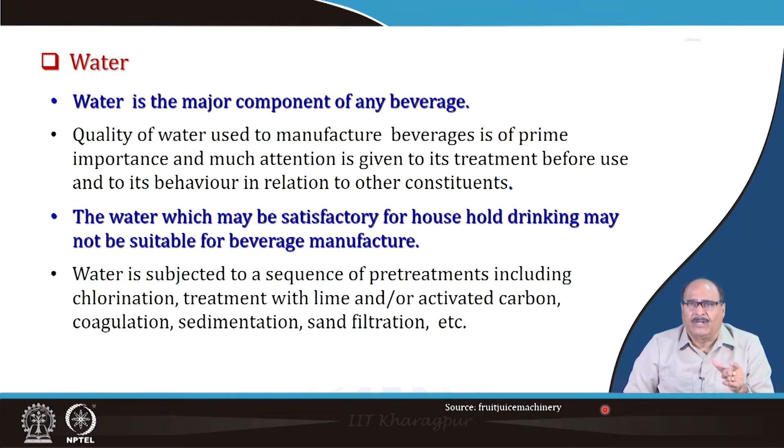The purpose is that it should not contain any suspended, colloidally suspended or dissolved solids. Otherwise, it may have unwanted reactions with the flavoring and coloring components of the juices, causing problems. So one should take care of that.

So this is the process flow chart for RTS mango beverage manufacturing. In the figure we have shown various brands available commercially in the market. As in the earlier lectures, we have seen up to pulping and extraction, and the same things follow here. After you get the pulp or juice of the desired soluble solids, desired Brix, it is filtered or clarified, and the clarified pulp or juice of desired soluble solids and total solids is mixed with the sugar syrup.

It is sent to the mixing tank, and that is very important: in the RTS mango beverage, what characteristics you want, whether a clear transparent juice or some mango solids content in it. Depending upon your requirement, you can do a proper material and mass balance using simple mathematical calculations.

For example, if you have pulp having 20% total soluble solids and you want to make a juice having 5% total soluble solids, you can calculate how much water is to be added. Accordingly, if you want to make it sweet, what is the degree of sweetness, the sugar and TSS level. All these considerations one can do with simple mathematical equations for the material balance.

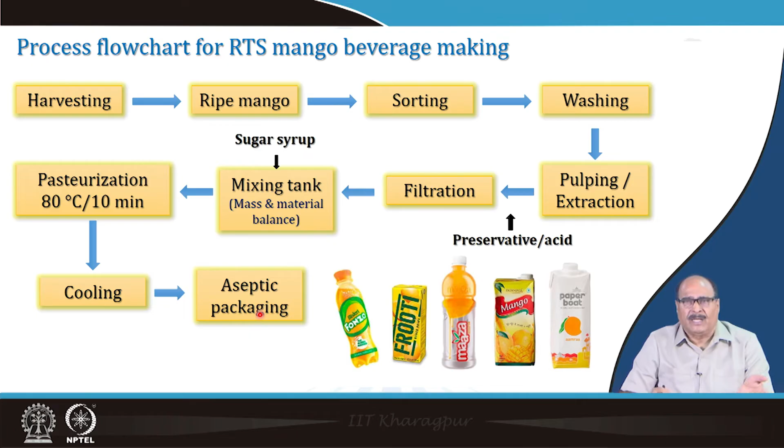After it is mixed properly, the RTS mango beverage is pasteurized at 80 degrees Celsius for 10 minutes, cooled down and sent to the aseptic packaging line. Aseptic processing and packaging we have already discussed in an earlier lecture.

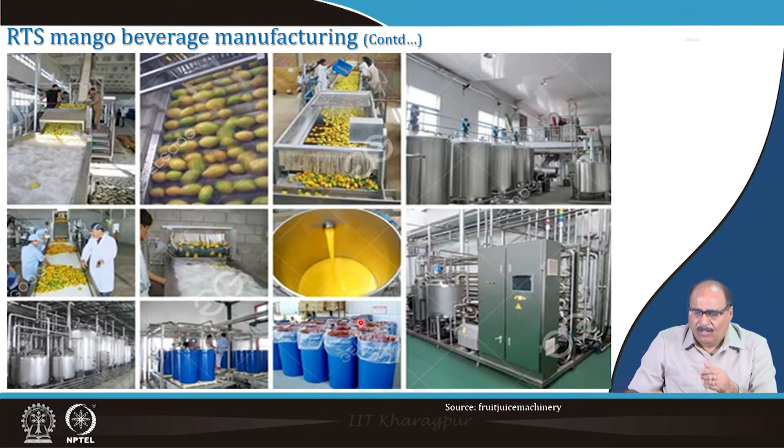These are some of the equipment and the factory line. The mango goes on the conveyor belt, then it is de-stoned and washed properly, the pulp is extracted and kept in containers, from where it is sent to the packaging line: aseptic processing, packaging, filling, mixing. These are the equipment used.

This is particularly for mango pulp, but the same equipment can be used for other fruits and vegetables as well, like the elevator, sorter, brush and spray cleaner, peeler, pulper, juice extractor, juice fine filter, pasteurizer, and aseptic packaging units. Almost all fruit and vegetable juice processing and packaging lines are like this, with some addition or deletion depending upon the characteristics of the fruit or vegetable. Otherwise, these are the most common.

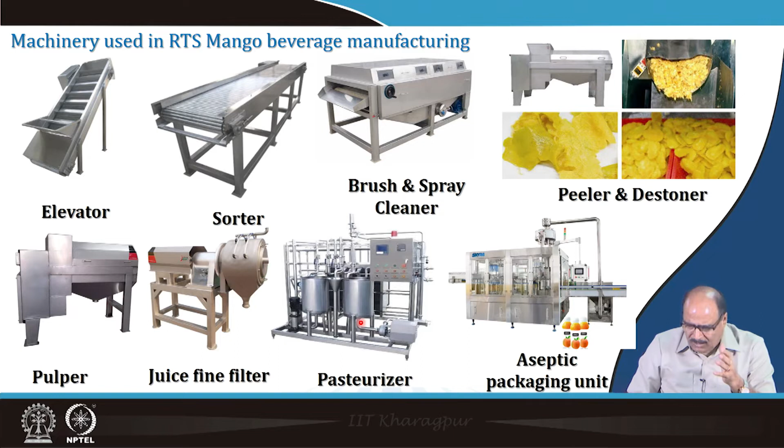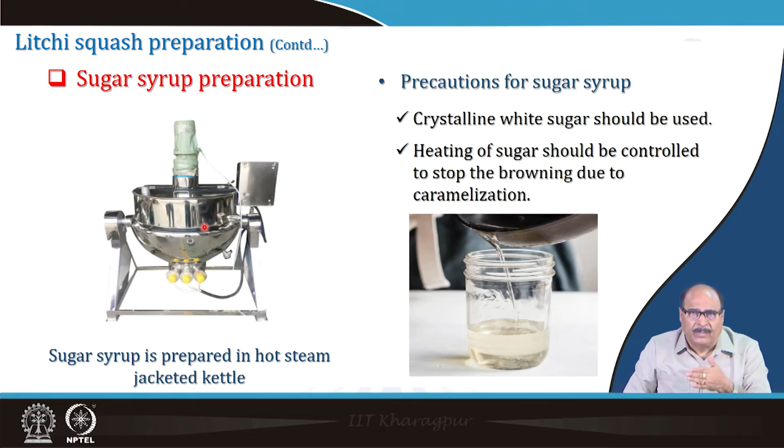So, in that 25%, what sugar level should be there so that you can get 40% TSS. But while doing this simple mathematical calculation, you have to take into account the complex biochemical interactions, that is, interactions of the different compounds which mix together, how the sugar is getting mixed and how the sensory characteristics are being diluted. Then it is followed by filtration, preservatives may be added, packaged, and then the aseptic processing line.

Then the cordial is another category of product. It is a juice from which all the insoluble material is filtered. It is a clear, sparkling, sweetened juice and is prepared from clarified juice. It should contain about 25% fruit pulp and 30° Brix TSS, with about 1.5% citric acid and 350 ppm sulfur dioxide as preservative. Lime and lemon are the most suitable for cordial making. They are generally blended together with wine for consumption.

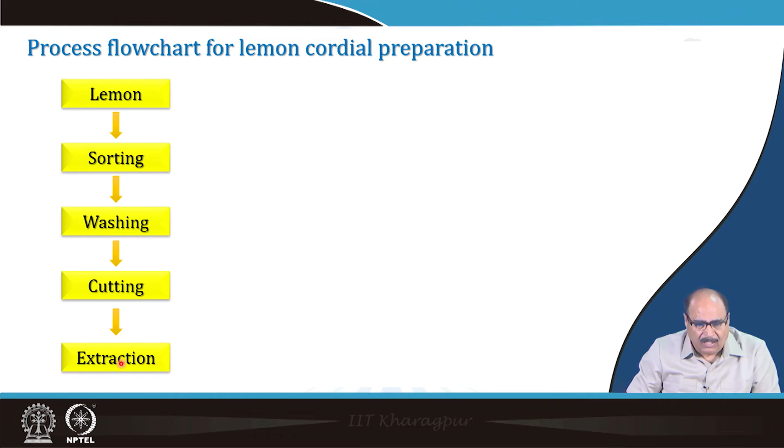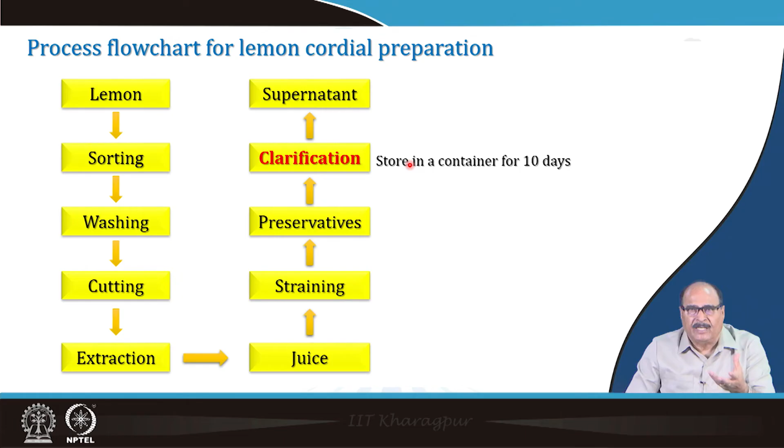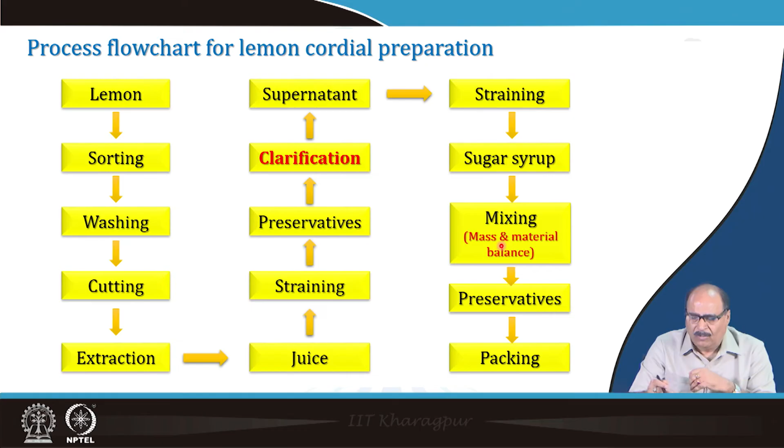So, the process flow chart for cordial preparation. For juice extraction, lemon is used, and we get the lemon juice; we have already discussed the whole process earlier. Then this juice is strained and preservatives are added. It is clarified; normally it is stored in a container for 10 days. The clear juice supernatant is taken, and whatever sediments are there are filtered away. Then the clear juice is mixed with the sugar syrup, preservatives are added, and it is packaged.

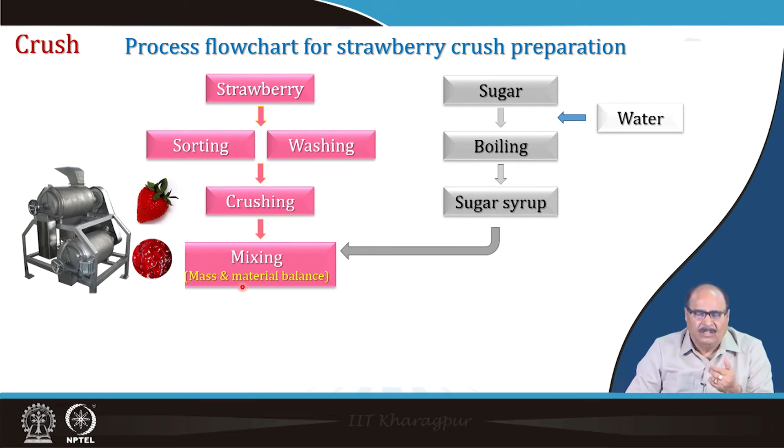Then crush is another product. The process flow chart for strawberry crush making: strawberries, sorting, washing, and then crushing. You have the crushed strawberries, and then the sugar boiled with water, the boiled sugar syrup, and then the crush and the sugar syrup are mixed. Mass and material balance is done to get the desired level of solids as well as total soluble solids, and then it is pasteurized, filled, packaged and stored.

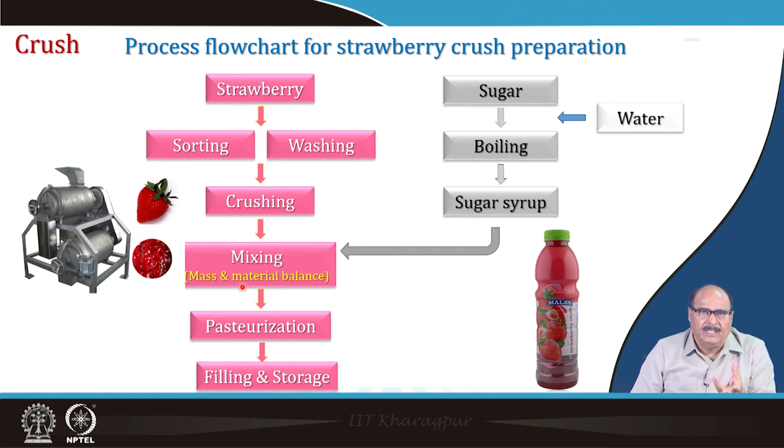Another category is the nectar. Some fruits contain high acidity or fruit pulp which hinders the development of fruit juice, and thus they are made palatable by adding water and sugar, and they are known as nectar. These include black currants, sour cherries and bananas. It contains fruit pulp, fruit fiber and pectin along with the sugars and preservatives. Nectar can also refer to the juice from fruit which is too thick to drink as it is. Examples are the juices from apricots, peaches, pears and so on.

Nectar is thicker than fruit juice, and is not as clear and smooth as a fresh fruit juice. It should contain at least 20% fruit juice or pulp, 15% TSS and also about 0.3% acid. It is not diluted before serving. So, it is made in this proportion.

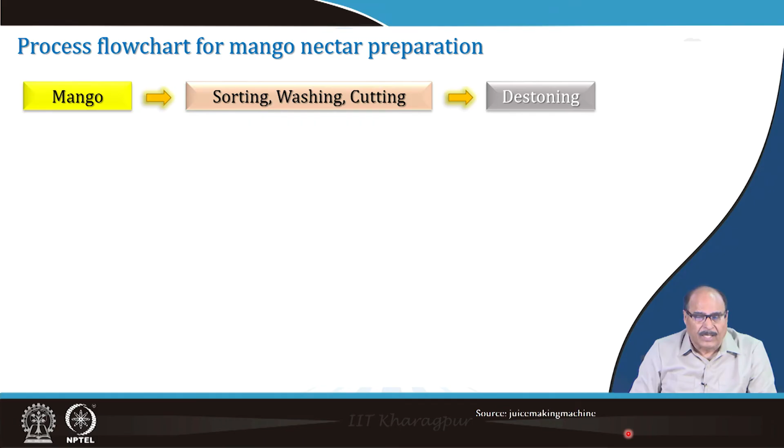Okay, process flow chart for mango nectar preparation. The mango is heated and you get the mango pulp as per the procedure discussed in earlier classes, and then sugar, additives and acids are added and mixed properly, adjusting the material mass and total soluble solids. The sugar should be added to ensure proper sweetness, with acid and sugar balancing, along with additives and preservatives. Then it goes through a colloid mill for uniform homogeneous suspension, and you get a smooth product.

Then degassing: any gas is removed to prevent oxidation. Then it is filled at around 65° Celsius and sealed. Care is taken that in the head space of the container there should not be any gas, otherwise it will create the problem of oxidation of the product. Finally, it is sterilized at 100° Celsius for 5 to 10 minutes, then cooled and stored. So, this is the process flow chart for mango nectar preparation.

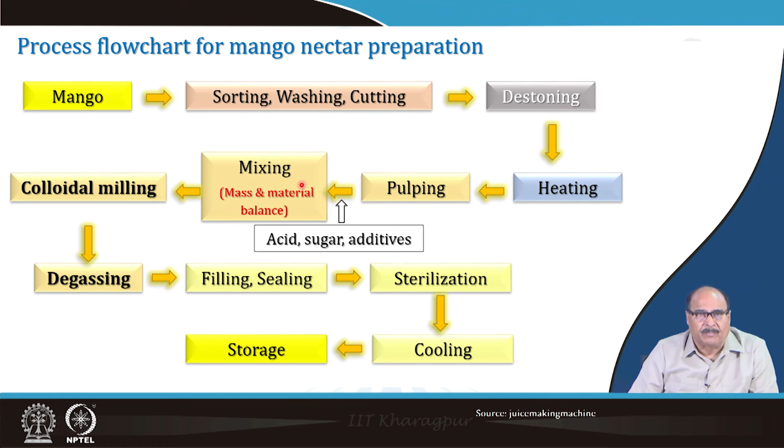Then carbonated fruit beverages are another category, getting popular day by day. Carbonated soft drinks are just thirst quenching, as I told you in the beginning, and they have refreshing properties, but they lack nutrition. So the Indian government, FSSAI, in 2016 regularized the use of fruit pulp: as per the requirement, a minimum of 5% fruit pulp should be used in carbonated beverages to make them carbonated fruit drinks.

The purpose is the enhancement of organoleptic properties as well as nutritional value, but it should be taken care that since carbon dioxide is being used, the taste of the fruit should go side by side. So sour fruits like amla, jamun, lime, etc. may be better suited for use in carbonated fruit beverages. Spices can also be used to enhance sensory properties, and the beverage could contain peel oil, fruit essence, or similar additions.

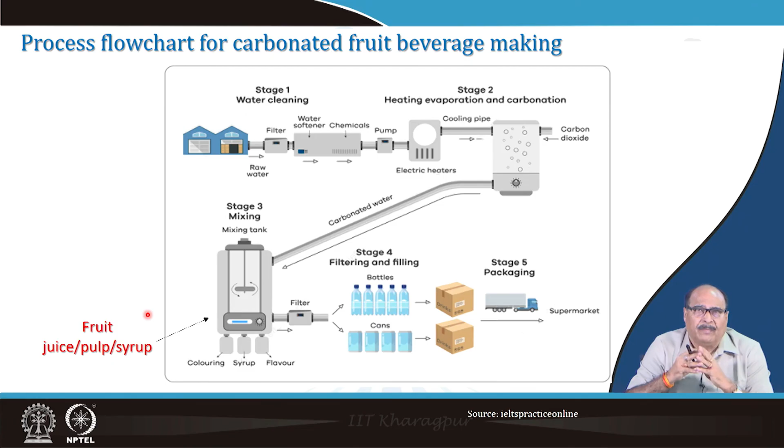But now, as per regulation, these synthetic flavors are replaced with natural fruit flavors, that is either fruit syrup, fruit pulp, or fruit juice, added in place of the synthetic color and flavor emulsion. The rest of the process remains almost the same. However, this has certain challenges: there is the amount of fruit used, and there should not be any unwanted reaction between the carbon dioxide and the flavoring or coloring components of the fruit juice. The product should also have proper shelf life and stability during storage, and problems related to oxidation should be avoided.

Now finally, there are certain issues and challenges in ready-to-serve and ready-to-drink beverages. One is the settling problem. You might have observed this in squashes made by the cold process, where enzymes like pectin methylesterase are not inactivated properly. During storage, this enzyme works on the pectin and demethylates it, and the demethylated pectin becomes insolubilized and settles out. This is called the settling or serum separation problem.

The other problem may arise from conventional heat treatment used for making the beverage, extraction, or concentration, which may have an adverse effect on nutritional quality, sensory characteristics, bioactive components, and so on. There is also the packaging problem: if the packaging material is not proper, it may result in oxidation-related changes, browning changes, etc. So the packaging should be proper.

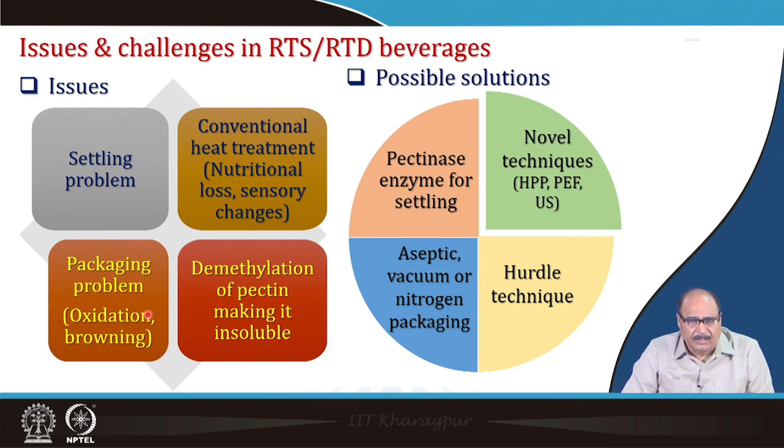So I think we come to the end of this lecture. A very important aspect is that fruit and vegetable ready-to-serve, ready-to-drink beverages and juices are a hub of nutrition, and there is a trend toward consuming more fruit and vegetable juices to get health advantages. In this category, to get better health drinks, care has to be taken that they are minimally processed, so that possible technological issues are properly addressed. It should be properly processed so that it has sufficient shelf life for commercial value, while also having good sensory characteristics and good bioactive and health components.